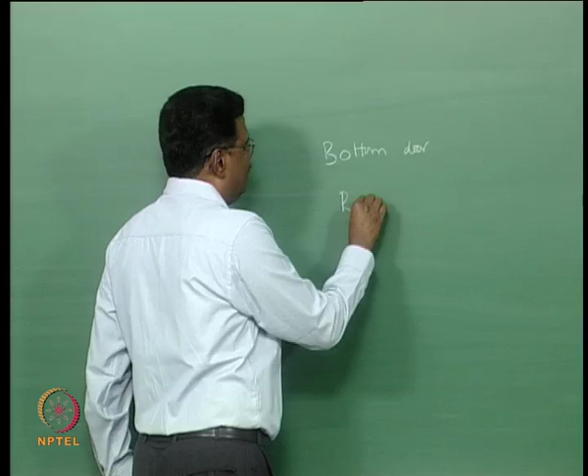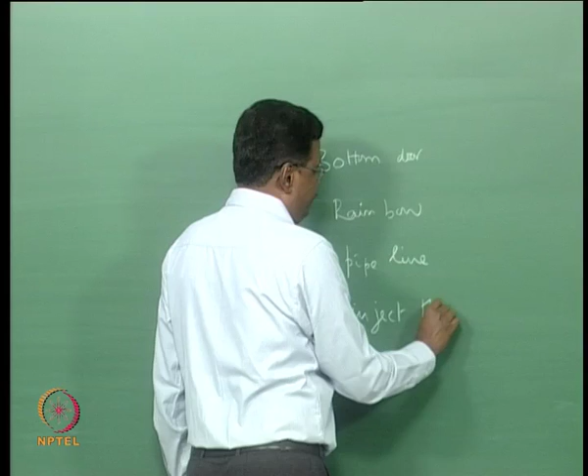The second one is by rainbow. Then we have pipeline. You can inject through the, what is it called, the suction head. So, these are the 4 methods of disposal. Which will be the fastest? Bottom door. The other 3 methods you have to do something before disposal. What is to be done? Bottom door you do not have to do anything, just open the bottom door, it will go. You have to mix with water. See, for all these 3 methods you have to mix with water.

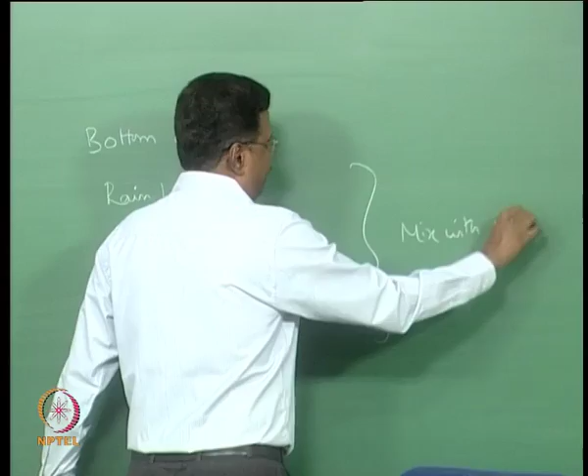Mixing with water means it is not easy because you cannot have the full capacity of the container, the compartment where you are storing the dredge material. It will overflow, water will overflow, the sediments will settle. If you want to mix it with water, then there should be some space available for mixing. So, you cannot carry the full capacity of the hopper. You have to mix it in the hopper, you have to mix it with water.

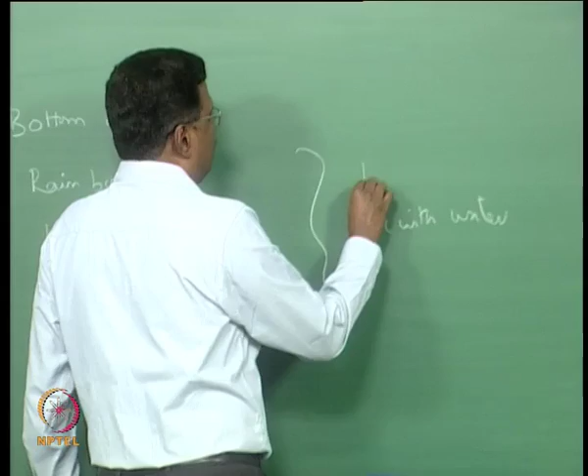Which is the best method for disposal? Or which is the worst method for disposal out of the 4 methods? What is it? Rainbow is not the worst. Then, which food is good, fast food or normal food? Which food is very bad? Which is the fastest method here? That is the worst method. Because when you are disposing very fast using a bottom barge, it will disturb the environment. In addition, the thickness of the sediment will be higher when you do that. That is why you cannot do it.

Rainbow technique is good if you are disposing it on the shoreline for nourishment. This we are doing in Gopalpur also. Then this injection through the suction head, whatever speed you are removing the dredge material, the same speed and the same manner you are disposing. Pipeline is for creating artificial islands or things like that. In Dubai, they want to create artificial islands for real estate purposes. There they use the pipeline, and you can use the pipeline instead of rainbowing also to dispose it onto the land, because rainbow you can do only up to 300 to 400 meters distance.

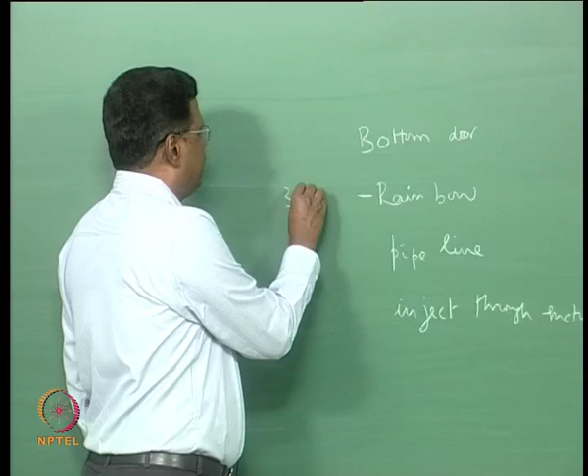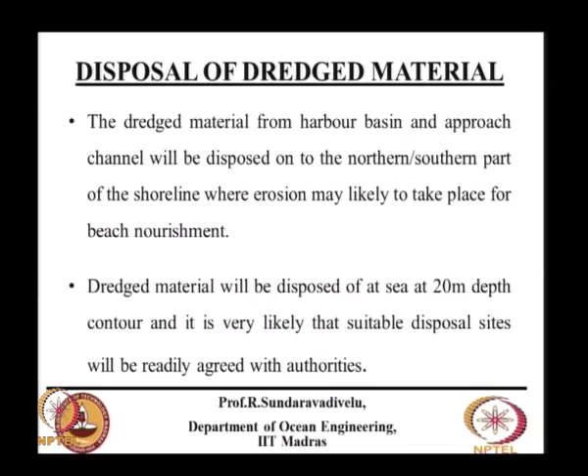So, you need a draft of about 6 meters for the trailing suction dredger. If the 6 meter contour is not very close by and you do a rainbow, it will not go to the shoreline. Then we have to use a pipeline. In dredging, if you have to get the environmental clearance, the main part they discuss is the disposal of dredge material. So, you can dispose it to the northern or southern part of the shoreline where erosion is likely to take place, for beach nourishment. There is an impact due to construction of a breakwater, either erosion or accretion. Accretion is not a very serious hazard, whereas erosion is a hazard.

Erosion, where will it take place on the eastern coast? Suppose you construct a breakwater, which side will the erosion take place? Northern side or southern side? Both are correct. Which season will the erosion take place on the northern side? How many seasons are there? Monsoon, non-monsoon. How many monsoons are there? What are the monsoons? In the non-monsoon season, littoral drift will be less. It will be there, but it will be very less. So, northeast and southwest monsoon.

Northeast monsoon, which side will be erosion? Southern side. Southwest means northern side. The southwest monsoon is for a longer period, so the erosion will take place on the northern side. November, December is the season for the northeast monsoon. If you go to Marina Beach, you can see some erosion during cyclone time. If you want to see erosion throughout, you go to the northern side.

The other option is to dispose at the 20 meter depth contour, and it is very likely that suitable disposal sites will be readily agreed with the authorities. So you can dispose at a water depth of about 20 meters or more. This may be at a distance of about 5 nautical miles from the shoreline. So you dredge it and dispose it off at 20 meter depth. There you can use the split barge, open the bottom door and dispose it off. When you dispose it off in the open sea at 20 meter depth, the permissible increase in seabed level is about 0.3 meters. Is it clear? The contour was minus 20, it can rise only up to minus 19.7.